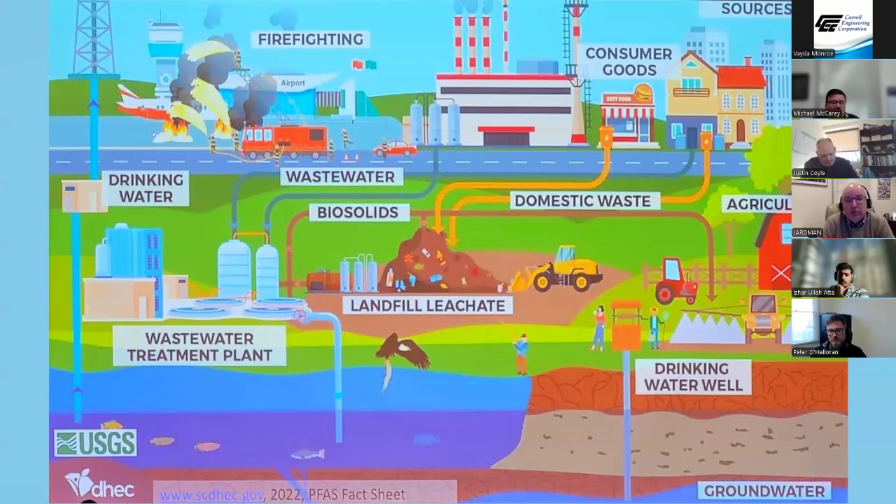We'll talk very quickly about the types of engineering work we do. Like Joel mentioned, we are complete turnkey work. So everything from a conceptual design, where we do a feasibility study to tell our client how they should upgrade their treatment plant or their pump station or their sewer.

We'll survey the property in order to then develop AutoCAD drawings, technical specifications that actually specify the type of equipment that we recommend for the project, permit applications, things that need to get submitted to DEP, for example, design calculations, all the sizing of pumps and sewer capacity, all the hydraulics and fluid flow classes you would have had in a civil and environmental engineering program.

Contract bidding, helping the client choose a contractor to actually do the work. And then the construction administration services. Everything that we do here at the office, RFIs and answering questions in real time, shop drawing reviews to actually prove to ourselves the contractor's buying and constructing the equipment that we specified, payment applications, as-built drawings, those kind of things, and field inspection. We pride ourselves in trying to have some of our younger staff then go on site and see the project get built.

So I'll give a couple quick examples of the types of projects that we've done. This is a project I'm wrapping up now. It's a water storage tank in the Poconos in the mountains of Pennsylvania. It was constructed just last year in 2024, 72 feet in diameter. It's this new tank here on the right-hand side.

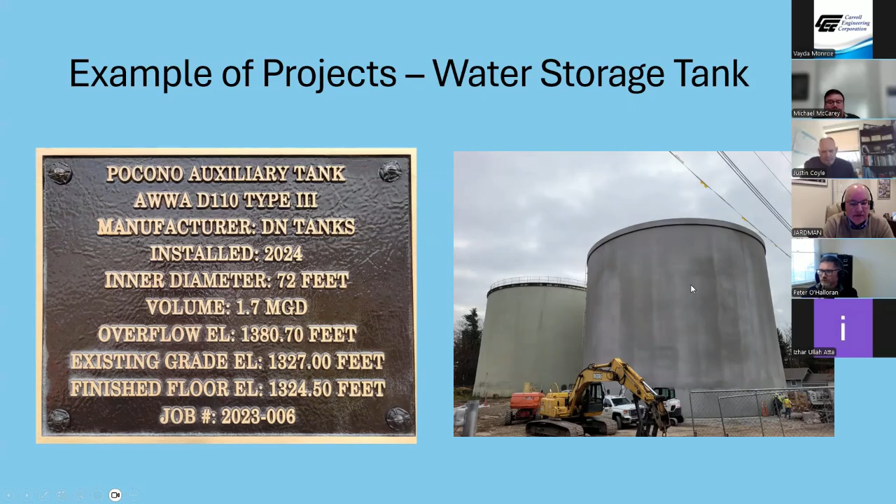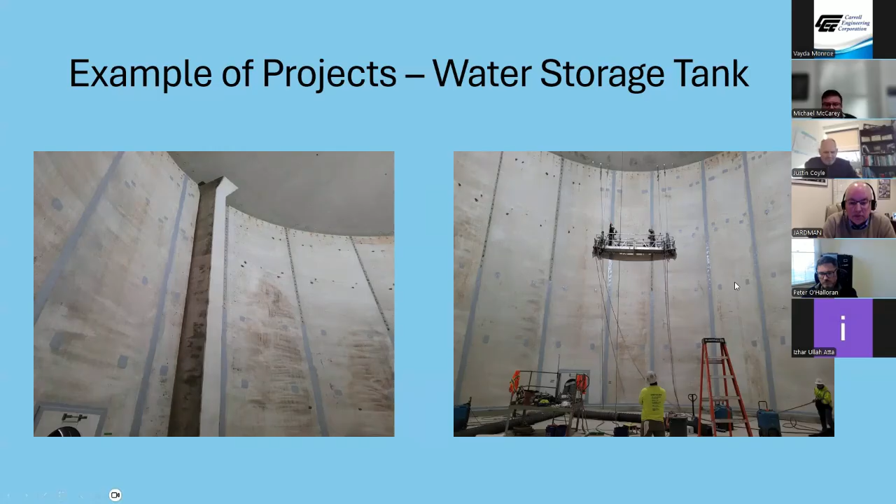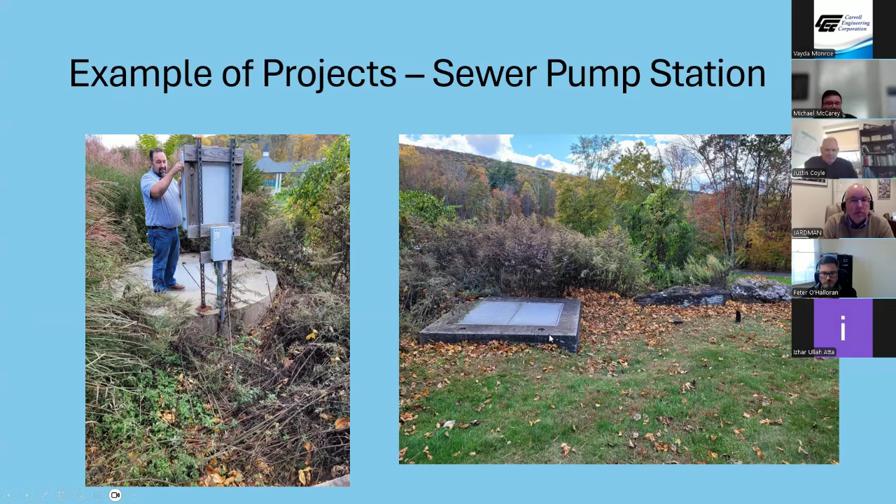Moving on, sewer pump stations. I took these pictures as well. This is also in the Poconos. It's actually adjacent to a golf course. You would never know it if you didn't know exactly where to look. On the left here is a wet well, the circular concrete chamber. So all the raw sewage pools in this chamber with pumps. And on the right-hand side are the valve vaults and the instrumentation, your flow meters, your isolation valves, things like that, before it pumps into the system. There's another example of the type of work that we do.

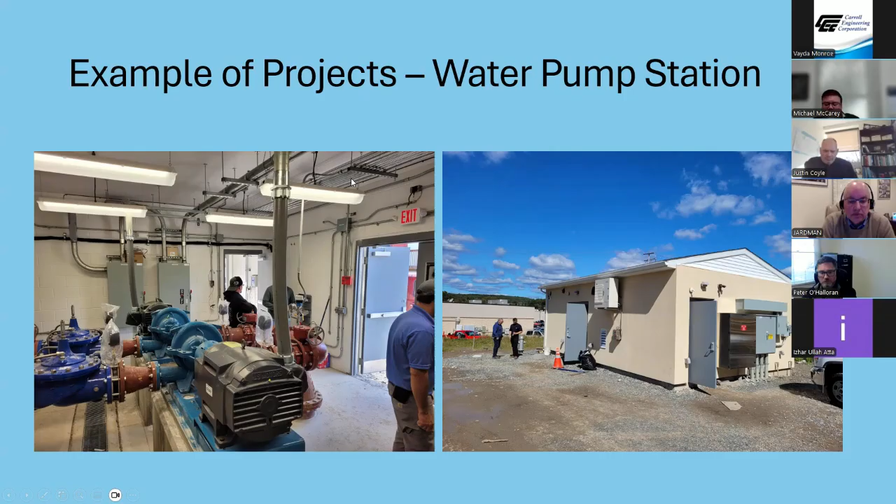So that was just a very quick overview of what we do in the Water and Wastewater Services Department.

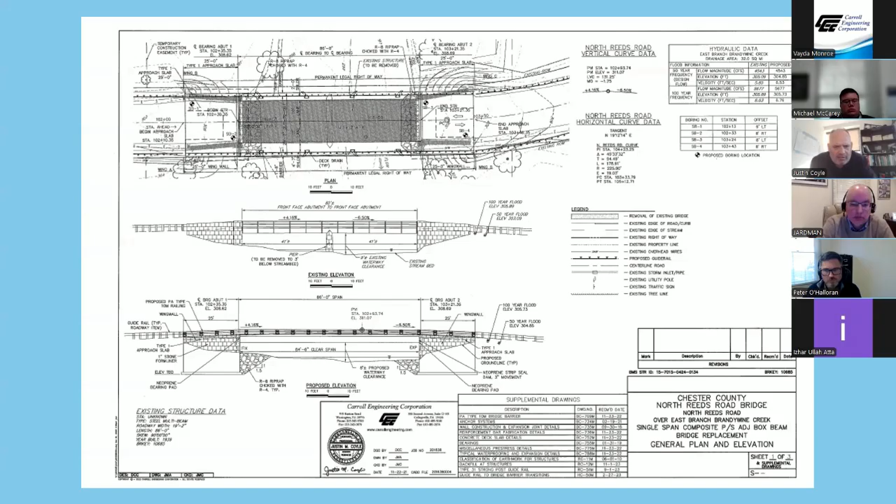Next slide. This is a typical profile. So this bridge is over a stream. So we have environmental engineering involved. We have H&H, which is hydrology and hydraulics engineering, which will do typically a model in HEC-RAS, where you're modeling the stream flow using the FEMA flood flows, looking at the existing condition compared to the proposed condition, and then not proposing any increase in the 100-year flood elevation. So there's hydraulics and hydrology involved very early on in a bridge design, especially when it comes to over-stream work.

And then we'll lay out, that's part of our roadway design. You'll put the curvatures in. You're looking at things like stopping sight distance, roadway curvature. Those things are all taken into account when you lay out the new road. So there's a typical profile of a new roadway.

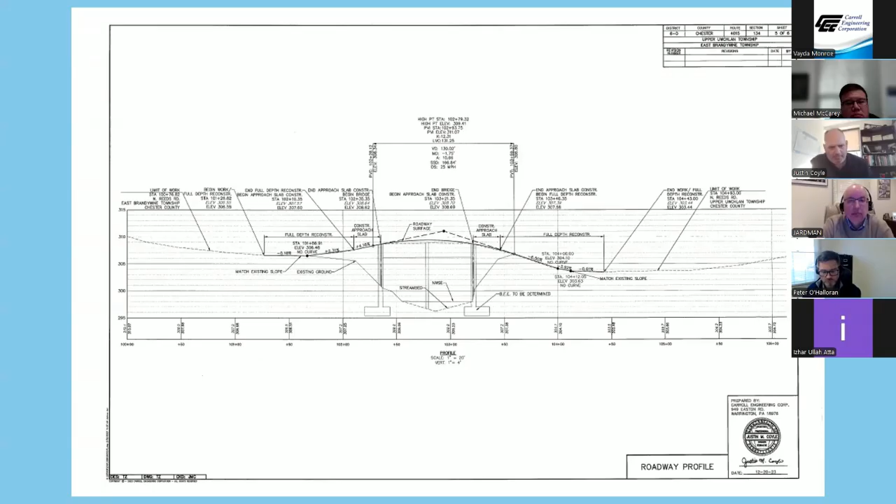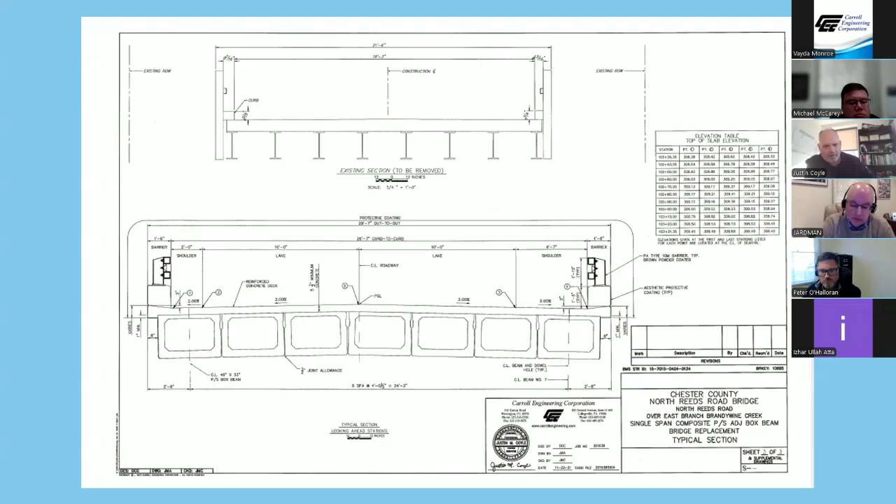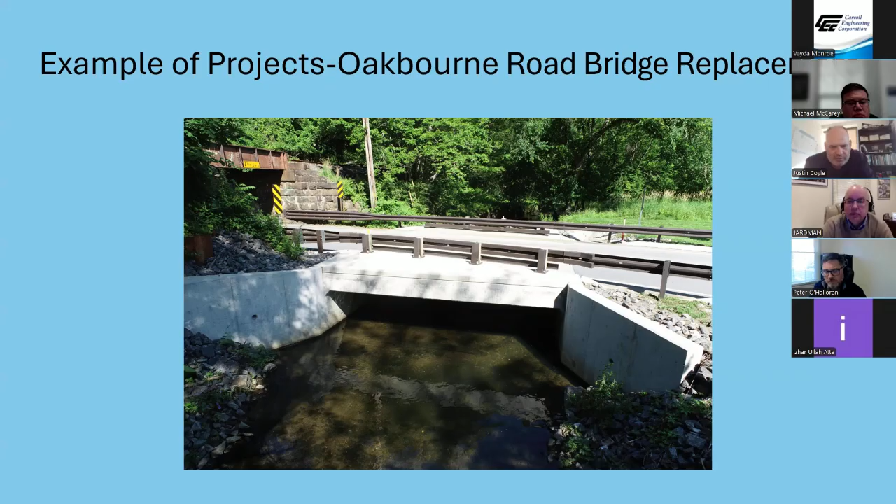Next slide. Thought we'd give you a couple real world examples. Here's an example of a box culvert bridge we designed. This was Oakbourne Road, Westtown Township. This was a little challenging. It was adjacent to a railroad, so we had to install sheet pile along the stream to stay within the limits of the footprint of the bridge and not impact the active railroad. We had active utility lines, we had water, we had gas, sanitary sewer, all being relocated. So even though it was a relatively small project, it had a lot of moving parts and a lot of different coordination on our end. So with that, next slide.

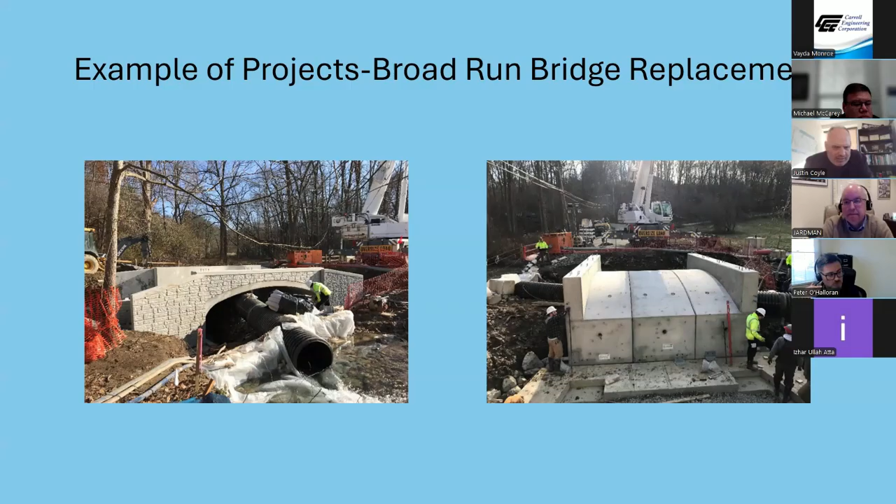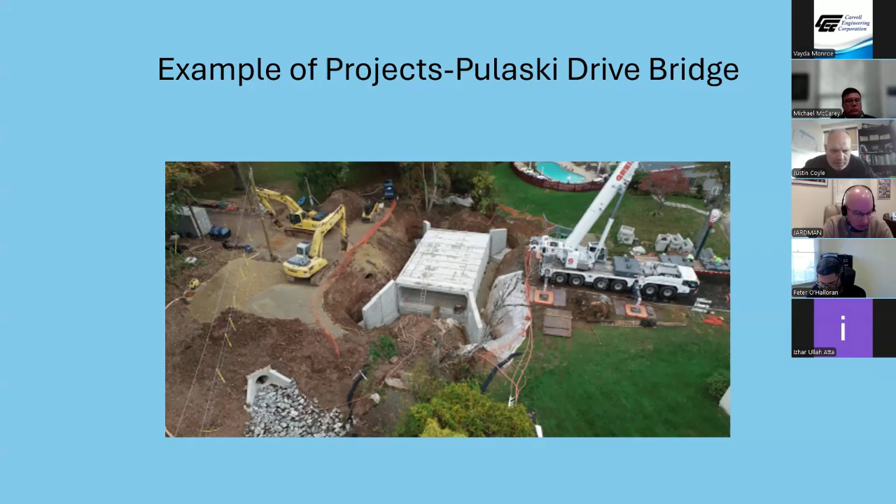Next slide. Here's an example for our construction inspection team. We actually are utilizing drones in our construction inspection. This was utilized for the Whitpain Bridge. This shows you the crane, how they have the pit excavated, how it's dewatered. There's bypass pumping. So all of this goes into the design plans. And then when our team is out there inspecting, we monitor the construction and recommend payments as it goes through for payment processing. But basically we're showing you we utilize the drone for on-site construction inspection services. Next slide.

I think that's it, Vayda, as far as projects, correct? Yeah, so hard to condense all of what we do into a five-minute presentation, but we just wanted to give you a flavor. Heavily involved in AutoCAD, design aspects, very critical in the beginning stages. And then once it moves into the construction phase, we're very hands-on. We're monitoring construction payments to the client. So you're really involved from beginning to end, and it's a very rewarding profession, if I must say. So with that, next slide.

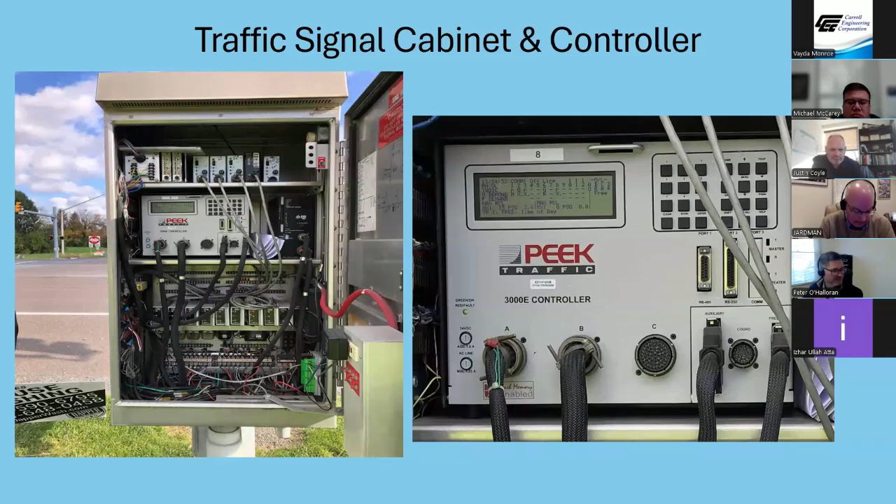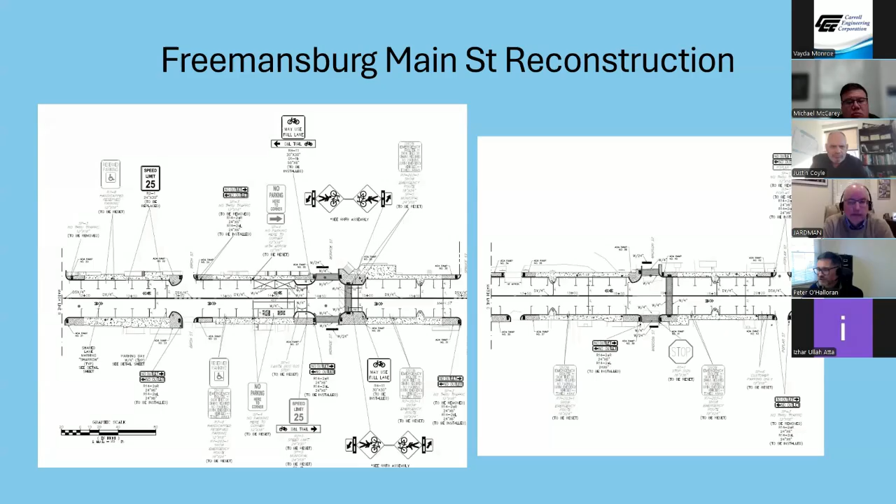That project is under construction, so I don't have a finished image to show you, but you can see what it looked like a few months ago, right during the project. In the scope of this project, we basically redesigned the road from curb to curb.

Another project that we're working on currently is up in Lower Nazareth in the Lehigh Valley. The intersection you're looking at here is Butztown and 191. As you can see, their angle of intersection is pretty acute, which, if you are coming on the leg from the bottom trying to make a left, can be tricky, not being able to see where you want to turn or see the oncoming traffic. So the township asked us to redesign that to a more traditional intersection. This is the project in progress, and here are our current design plans.

As you can see, we've brought the intersection in at a perpendicular angle. And then the space that's left over, we've proposed to put in some nice landscaping. And we've also been able to squeeze in an additional left turn lane up here for folks who want to do that. Yes, that project is ongoing right now.

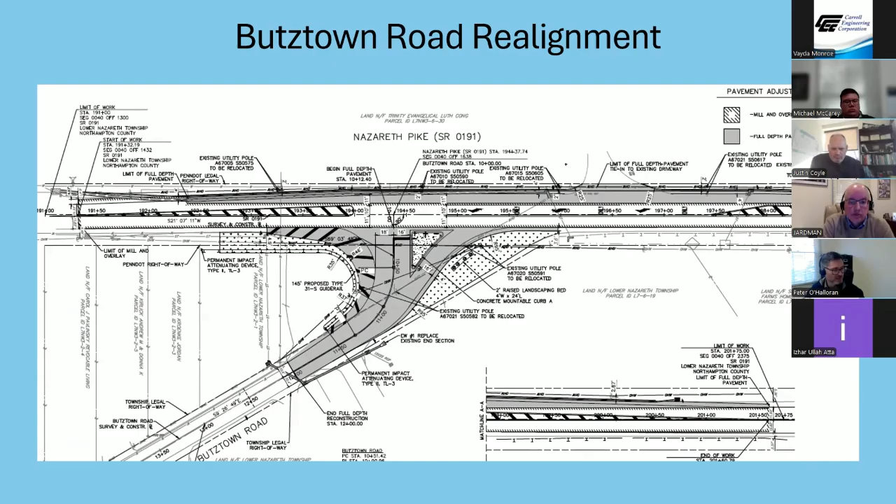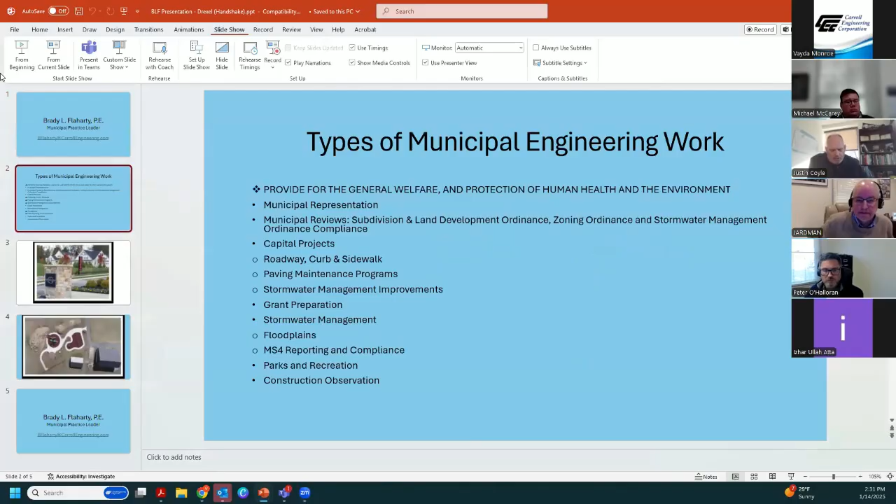As you heard, we do quite a bit of municipal work. And Justin not only is a structural engineer, but also a municipal engineer. So maybe Justin can just touch on our general municipal work that we do. Thank you, Vayda. Sure, thanks, Joel. Yeah, our colleague, Brady Flaharty, he's out sick today, so I'll just briefly go over it. He's our municipal department practice leader. He put together just a brief overview of what we do for municipal engineering.

So you've got to think of it as working pretty much for a municipality, for a township, for a borough, where they hire or appoint a civil engineer to do a lot of the civil engineering projects on their behalf, whether you're reviewing plans for that municipality or actually doing capital projects for the municipality. So you're pretty much their right-hand person when it comes to civil engineering projects, whether review or design.

And just listed here, municipal engineering gets to be a little bit more challenging. You have a lot more interface with the public, a lot more interface with clients because you're at public meetings. You're engaged more with the daily or weekly operations of that municipality, as opposed to working on, say, more of a design project where you're kind of working behind the scenes. Municipal engineers are definitely more at the forefront, involved with the public than other aspects of what we do for the company. There's ordinance reviews that have to be done, capital projects we mentioned.

That could be for roadway work like Peter's group, curb and sidewalk improvements, like enhancement projects along a roadway. We mentioned that Freemansburg project. Paving maintenance, so that's doing either repaving, new paving methods, chip and seal, whether you're putting a slurry down. So that's more preservation and maintenance of roadways, which is very critical to municipalities because that's a lot of what their expenditures go to as far as roadway repairs and maintenance.